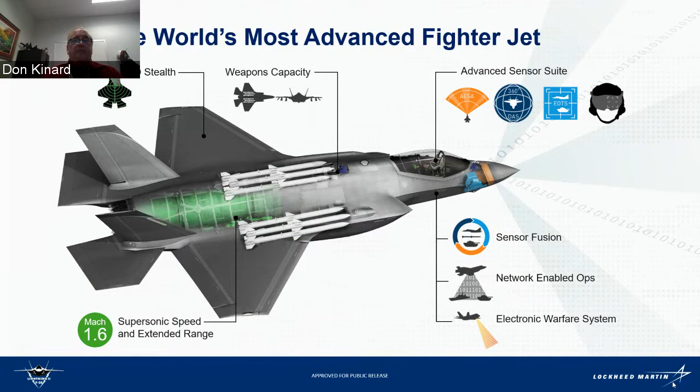Production ramp. Here you get a little bit of history starting back in 2011 with the first production aircraft. We ramped up and stayed at about 30 aircraft for a while as we were doing all of the SDD testing, all the static aircraft testing, the fatigue testing. We started ramping up really in about 2017, went from 66 to 91, had 134 aircraft delivered last year, and we were planning this year to be over 140 aircraft, and of course COVID had something to say about that. So we're going to be in the mid-20s, mid-120s probably for the year. I don't know the exact number there. But again, we're working real hard with our supply chain.

The issue has really been the supply chain. A lot of our suppliers, remember, we're an international program. We buy parts from all over the world, from Italy, from Israel, from all over Europe and Japan for this airplane. And so the international feel for the airplane, international involvement of the airplane, has really driven some of the supply chain issues. But again, we're working with them. Lockheed funded a lot of our suppliers to stay in business while they could continue to make parts for us. And so we're slowly recovering and ought to be recovering sometime towards the end of next year with the deliveries. Again, lots of capacity for future orders. We're starting to fill those wells out in front of us. But we're essentially at rate production right now, or will be very quickly.

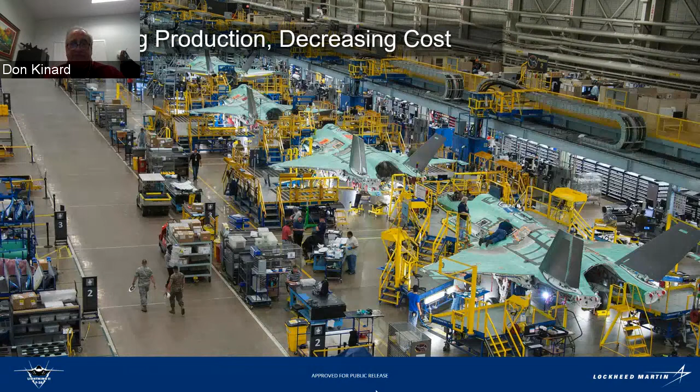As we've increased the production rate starting back in LRIP 1, we've reduced the cost by about 70% as the production rate's gone from 32 aircraft a year to about 140 aircraft a year.

I'll point out our mechanics, we hire mechanics and then we teach them how to be F-35 mechanics. One of the big things we did on the F-35 is we set up a very rigorous training program where we have components that the mechanics work on in training that resemble the aircraft and the configurations. In fact, we have a weapons bay with very complex harness installations for the weapons bays. We have finishes of the airplane, of course, very complicated finishes on this aircraft, and we have the mechanics work with realistic components to learn how to apply all the coatings and finishes to the airplane. And in fact, even in our weapons bay harness installation component, we even use augmented reality to help teach the mechanics about building the airplane. We have our first deployment of augmented reality in production on the F-35 with wire harness installations for the wing. Next chart.

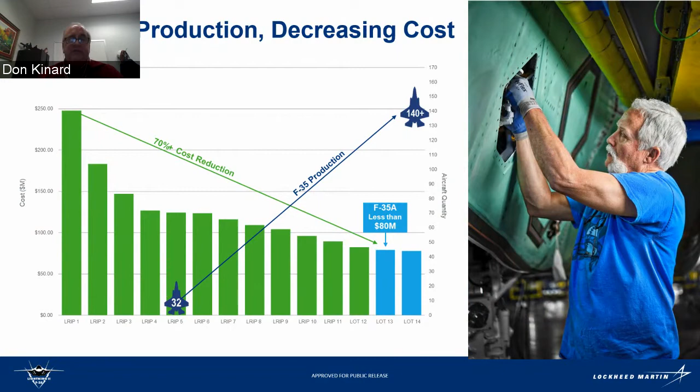What has facilitated our cost reduction and affordability opportunities is really the digital thread. People talk about model-based engineering like it's something new in the business, but we've been doing model-based engineering, along with a lot of other people, for 20 years. We release solid models to the suppliers and use solid models for integrating between our partners. Our partners are Northrop Grumman, BAE, and Pratt & Whitney for the engines. All of the models were coordinated, and all the integration was done through the models.

We send solid models, for example, from metal parts directly to the suppliers. They inspect to those 3D solid models, and they NC program the machining to those 3D solid models. We did simulations. So the digital thread is really the creation, use, and reuse of model-based data from engineering to manufacturing to sustainment, and all those models end up in the sustainment tech order. So there's a lot of visual quality to it. We have 3D visualization software used for work instructions, and also did a lot of inspections using laser trackers and NC programming.

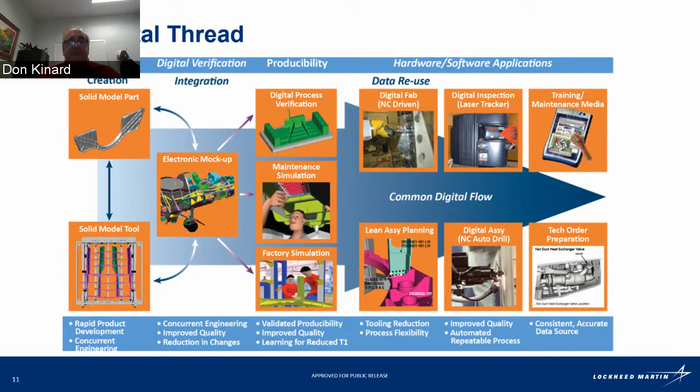Now, automation—if we go to the next chart—automated drilling was enabled by the digital thread. For example, the engineering information had the vectors for the holes and the material stacks, and we used that to program the automated drilling. We automatically drill about 20% of the holes on the airplane, but we continue to add more capability to drill holes as we mature and bring in more equipment and get to the higher rates.

Most of the equipment has been these gantries, but we're starting to now bring in some actual robot drilling. I know Northrop Grumman used robotic drilling originally in their inlet ducts and other places, and we've started now bringing them in to use for harder-to-reach spots.

Now these automated drilling machines drill, ream, and countersink in one step. It's a stacked drilling operation, and in the near term we're actually going to start measuring the grips as we drill the hole so we can hit the fasteners more efficiently.

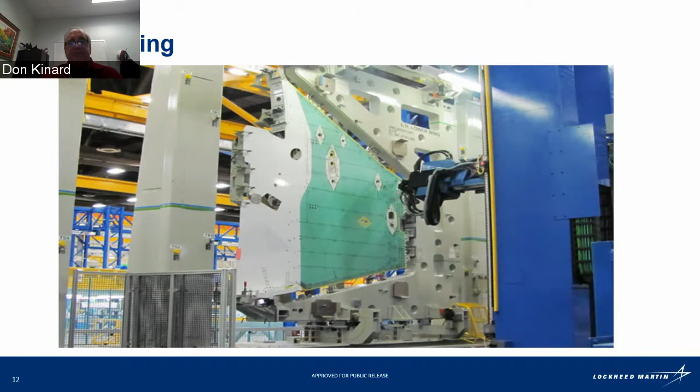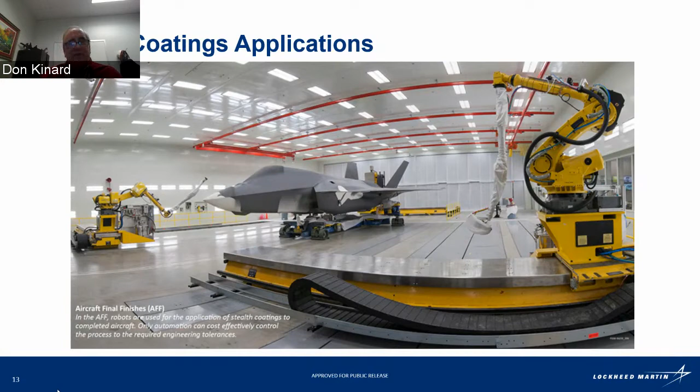The other part of automation, and not unexpectedly, is robotic coatings. All of the coatings on the aircraft are applied using robots. Robots control the amount of material that gets on the airplane—highly repeatable. Obviously we want to put enough coating everywhere, but not too much. So this is one of those ways we're trying to utilize the coatings, or the robots, to apply highly accurate materials on the airplane, and it has been a big success.

And the third application of the digital thread is taking the 3D work instructions, the 3D data, and putting it into the hands of the mechanics. Several examples of that—this one here, we're using optical projection, projecting into the inlet duct, in this case in Marietta, Georgia, a pattern of what fasteners go in what holes, to make it easier for the mechanics. Otherwise, the mechanics would have to look at drawings. Other ways of doing this same type of thing might be augmented reality, but we have found optical projection to be a very efficient way of providing that information to mechanics.

And there's a lot of different kinds of fasteners in here. You not only have different grip lengths of fasteners, different sizes, but you also have Inconel fasteners versus titanium fasteners. So all of those things—this equipment helps relieve the mechanic of having to look through a bunch of drawing pages and writing on the skins which fastener goes in what hole. So this is one way we found to consume the engineering in a way that benefits the mechanics.

Other examples of that include additive manufacturing. We have made thousands and thousands of tools—temporary tools, partial tools for the mechanics to use on the floor, masking agents, all sorts of different developments or different applications for plastic tools. We have quite a few machines here cranking out these tools.

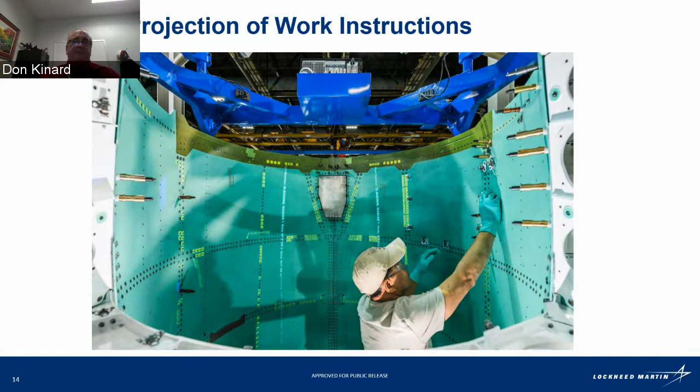So that gives you a little bit of perspective of where we've been. We utilize the digital thread in production to reduce cost. We have a lot of robot systems coming in, about 70 different robotic systems, some of them duplicates, coming in over the next 2 years. So there's a lot of activity still on affordability for F-35.

One of the great things about F-35 compared to F-22 is that I have a long production forecast, which allows us to continually invest in development of the aircraft and improvement of cost and affordability. That's a big benefit for a long-term program like this. A lot of the technologies we develop for manufacturing also apply to sustainment—things like augmented reality, drilling technologies, and additive manufacturing all benefit sustainment as well as manufacturing.

Industry 4.0 is another focus for us. That's the next industrial revolution—the integration of data, taking data from the floor, connecting our equipment with IoT technology, using it to reduce costs later in production, generating automated reporting, and using data analytics and AI to do analysis. That's really one of our key focuses for the future.

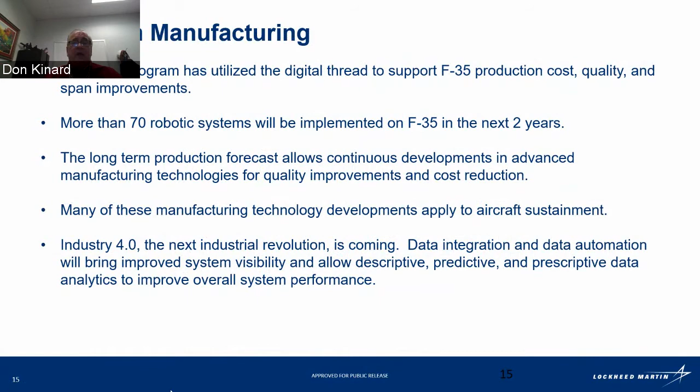The more countries that join the program, the more interesting this gets. But again, this is going very well. I mentioned that 9 countries already have aircraft in country, so this is going well.

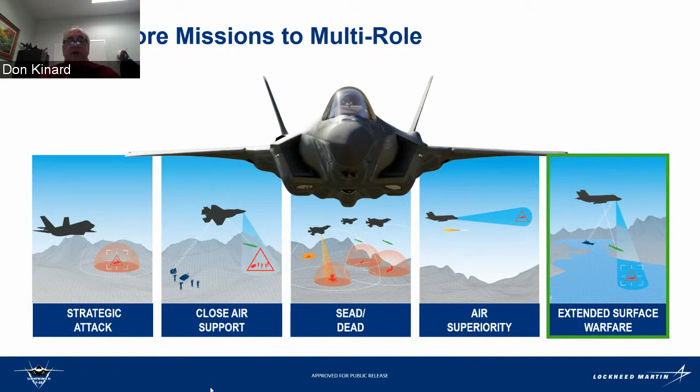One of the things we're doing is adding more missions to our multi-role fighter. We're already mission-capable for strategic attack, close air support, and SEAD, air superiority, and now extending to surface warfare with all of our ops and communications capabilities of the airplane. So we're continuing to add missions.

We're essentially widening the gap over fourth-gen aircraft. The F-22 and F-35 are the only fifth-generation aircraft. We've added Auto GCAS, which is being integrated—we got the Collier Trophy a couple years ago for Auto GCAS, a program that protects pilots from running aground, so to speak. We have open systems architecture coming on board in Tech Refresh 3, TR3. Multi-domain operations are continuing to get improved. Unmanned teaming with drones is something we're working on. Missile defense, extending the range of the airplane, and of course a lot of classified opportunities. So we're continuing to add capabilities to the aircraft as time goes on.

This happens really in blocks. We started with Block 3, we're putting in Block 4 right now, but there are plans for Block 5 and Block 6. Capabilities get added as the technology improves—it's just a continuous improvement of the airplane.

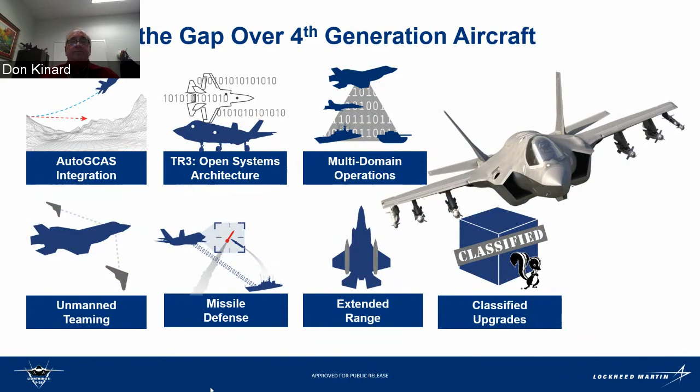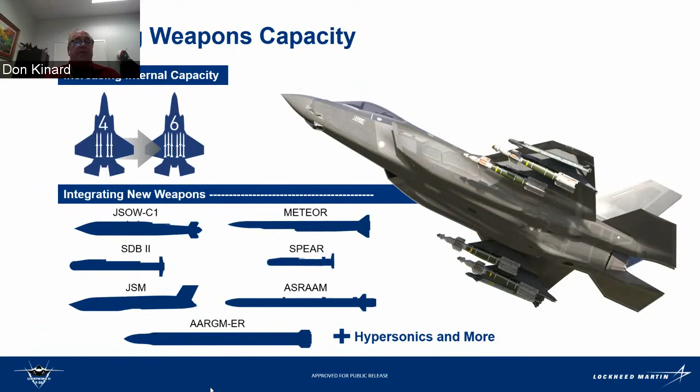Same thing with weapons. We're increasing internal weapons capability, integrating new weapons into the airplane, including some from different countries. That's kind of part of our business model, some countries want some of their own things. So that's also things we're working on, increasing the capacity for weapons as well as the different types of weapons that go in there.

So this is one of our kind of get-off-the-stage charts. Tara, one more, and we'll have a little bit - hopefully the video will play here well, even though you can't hear the music. And Tara, if it's too jumpy, we can just go through it.

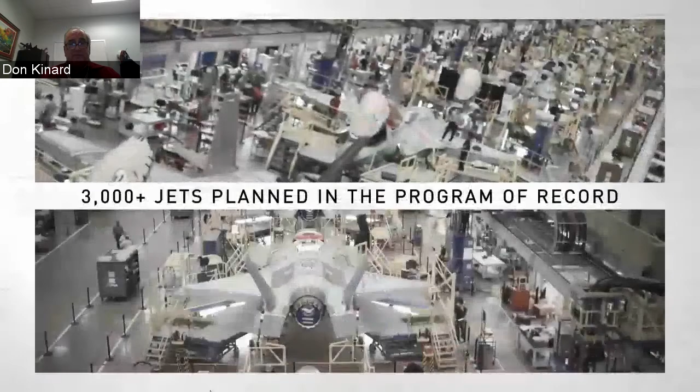Over 3,000 jets are planned overall for the airplane. We've built 585 so far. Now it's actually 26 bases, and 335,000 flying hours. Again, I mentioned 1,200 pilots trained now - this was for AeroDef last year - and about 10,000 maintainers trained.

Services are declaring IOC, initial operating capability, continues to improve. 9 countries in-country flying, and reduction in costs for the airplane. By the way, these $80 million prices are pretty comparable for some of the fourth gen fighters out there. So very focused on sustaining these aircraft in the field and making sure the customer gets their money's worth from the aircraft with availability.

Huge supplier base all around the globe, thousands and thousands of jobs in lots of different countries, a lot of advanced technology. This is a heck of a program.

By the way, I'll recommend you go to f35.com - there's always cool videos and stuff on there. And that may have been the last chart, Tara. Is there one more for questions, maybe?

Great. In any case, I wanted to wrap up by saying that I've been on the F-35 program. I came on about 2004, I worked on it a little bit before, but I came on in 2004 as we were really starting to get the first production aircraft really designed and out.

The factory here has got over 200 aircraft working at any one time in the factory here, we're cranking them out. Today, of course, you go out there and it's a sea of safety glasses and COVID masks. The mechanics are probably - and if you've ever worn a mask and sunglasses or glasses, you understand how difficult it is. But that's something we're going through.